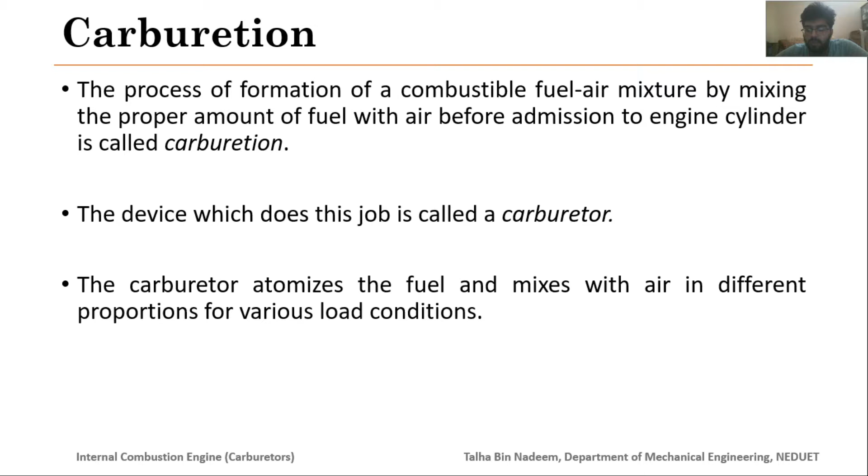Then we had a look regarding the carburetion. We discussed what is carburetion and what is the purpose of carburetor. We concluded by saying that the carburetors are those devices which form the air-fuel mixture, and not only form the air-fuel mixture, but also atomize the fuel depending upon the various load conditions. And why is the atomization important? In order to ensure the formation of homogeneous mixture.

Then we discussed the factors which affect the carburetion. First one was the engine speed, how the variation in engine speeds regulates the requirement of the air-fuel mixture. Then we had a discussion regarding the vaporization characteristics of the fuel, that if the fuel is volatile, it is going to make a more homogeneous mixture.

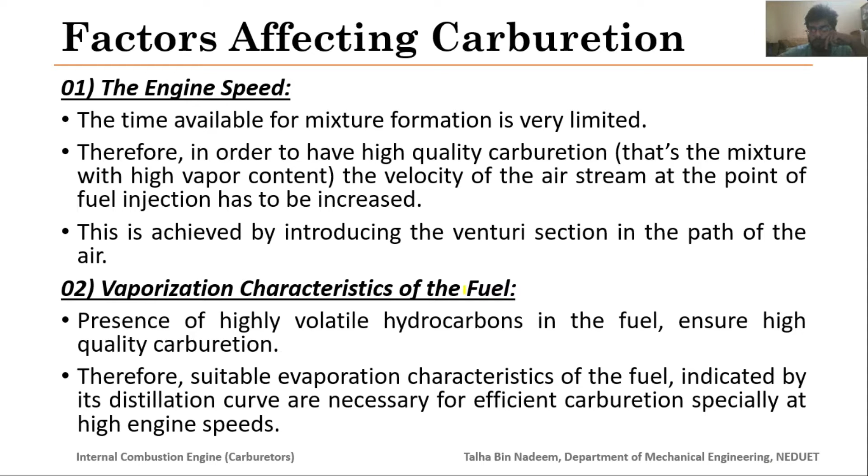The third factor which we discussed was the temperature of the incoming air, and we concluded by saying that higher incoming temperature of air will increase the vaporization of the fuel, which is basically a benefit. But the disadvantage of increasing the temperature of incoming air is that it will reduce the volumetric efficiency of the engine, as the mass of the air going into the combustion chamber has been reduced, so the volumetric efficiency will decrease.

The last factor which we discussed was engine design, and we discussed that when we have a number of cylinders in an engine, and we want to supply the same air fuel ratio in each cylinder, for that purpose the designing of an engine is very important.

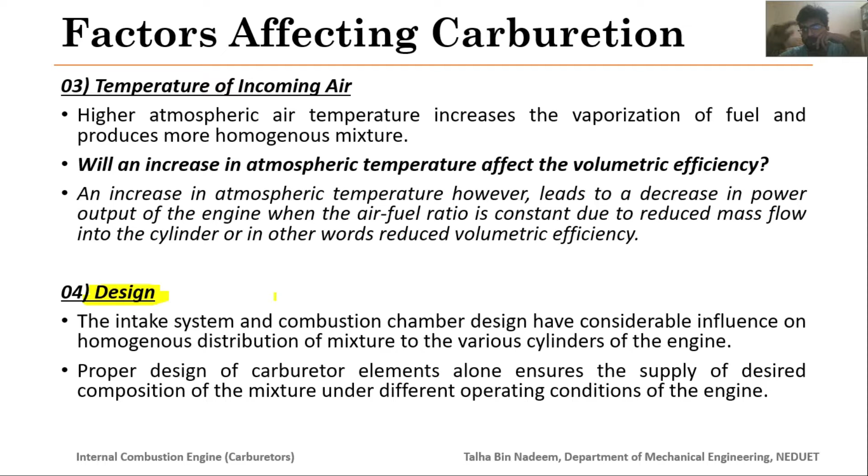Then we started with the air fuel mixture requirements, and we had a detailed discussion regarding the chemically correct, or you can say stoichiometric mixture. Then we studied the rich mixture and lean mixture as well, and we also discussed this diagram, in which we concluded that from 9 to something like 19, this is the combustible range. Within this range your IC engine will operate

quite comfortably, but if you go beyond this range, when the mixture is too rich, we have a less amount of oxygen, so improper combustion may occur, or the flame may not propagate throughout the combustion chamber. Similarly, in the case of the lean mixture, if we have too many air molecules, they will not allow the fuel to burn as well. In fact, they will not propagate the flame in the whole combustion chamber.

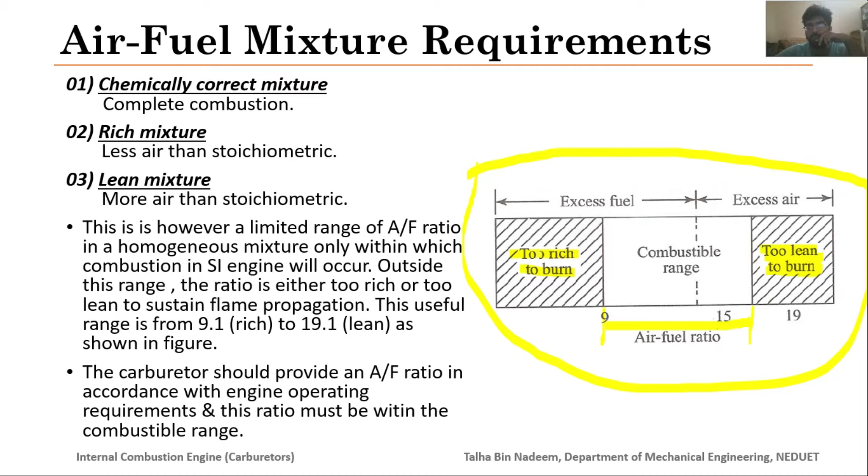Then we discussed these graphs. In fact, there are two graphs, air fuel ratio and power output, and the second one is air fuel ratio and brake specific fuel consumption. And we concluded this graph by saying that whenever we require higher power, we have to provide a rich air fuel mixture. This is the stoichiometric mixture line, and if we provide the rich mixture, which is on the left side of this stoichiometric mixture line, then we can have the best power output, which is the requirement in the case of acceleration or in the idling case.

And then we also discussed this second graph, of the air fuel ratio and the brake specific fuel consumption. In this graph we basically concluded that when you are operating under normal conditions or you have a cruising operation, then you will not provide a stoichiometric mixture, rather you will provide the best economy mixture, which is slightly leaner than the stoichiometric mixture. So under normal conditions, it is desirable to have a maximum economy mixture, but when you require quick acceleration or maximum power, you require a rich mixture. When you require more power, you will send rich mixture. When you require best economy, you will send lean mixture.

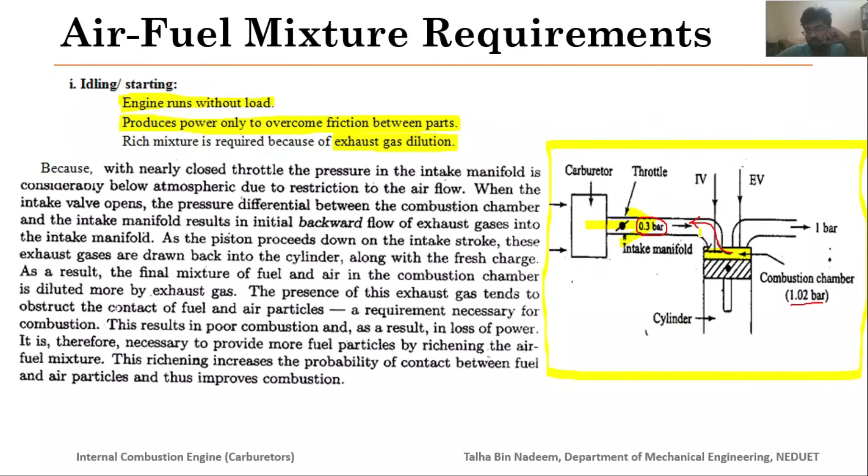So in that case, these exhaust gases will dilute the fresh incoming air-fuel mixture, and when the piston goes down, it will come again inside the combustion chamber for combustion, and your fresh air-fuel mixture has been diluted. This ultimately affects your combustion, there will be some power losses, and you will not get the proper output which is desirable to overcome the friction between the static parts.

So you can simply say that because of the pressure difference, initially there will be a backflow of the exhaust gases into the intake manifold, which will ultimately dilute your fresh incoming air, which will result in poor combustion and loss of power. So to overcome this situation, we will provide some additional fuel, or you can say a rich fuel air mixture.

And by rich fuel air mixture we mean we will have more fuel particles along with the air particles. I explained the rich fuel mixture in the last lecture as well: for example, if a molecule of a fuel requires 10 air molecules for proper, stoichiometric combustion, and instead of providing 10 molecules I provide 8 molecules of air, this will be called a rich air fuel mixture.

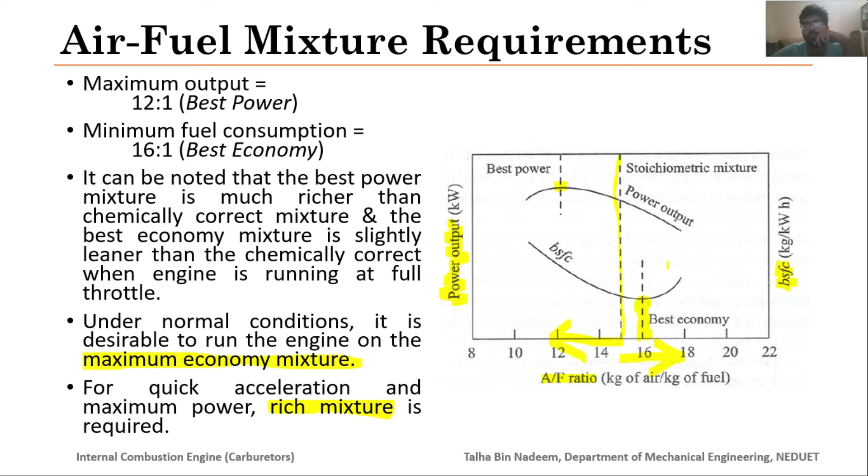So it is good that under the normal condition, if you are providing a lean air fuel mixture, you will have a lower brake specific fuel consumption, and your power outputs would be the same, since the engine is already operating on those conditions.

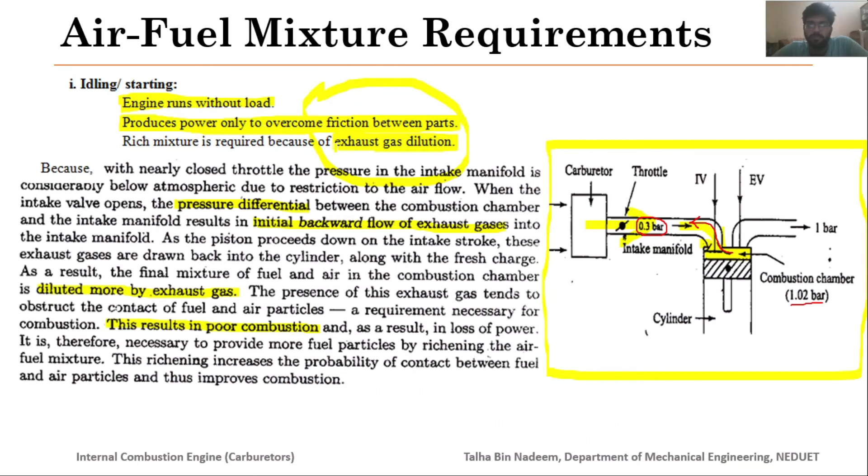So these are the basic components which we have discussed so far. I hope it is clear to you. Today we started with the idling and starting condition. Then we moved towards cruising and normal power, then to maximum power. Then we discussed some of the basic components of the carburetor.

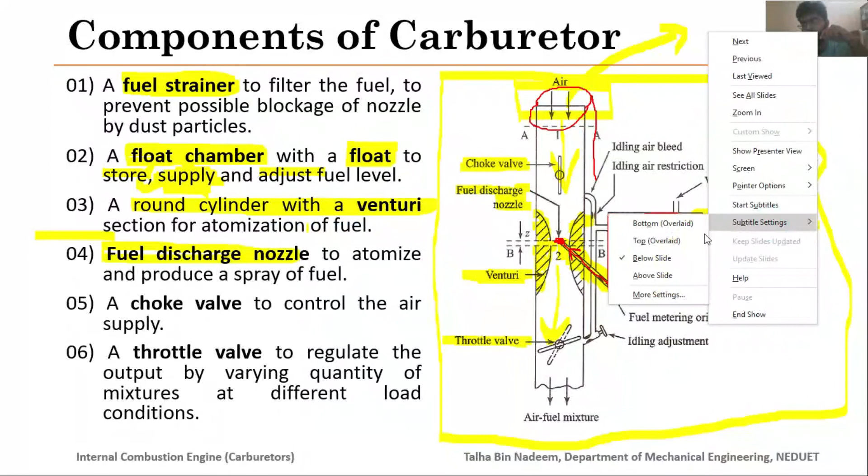Then the air flows into the venturi section, which is sometimes also referred to as a choke tube or a converging diverging nozzle, where the air velocity increases at the expense of a decrease in pressure. And I have already explained that the velocity of the air will increase when the air goes from point 1 to point 2, and because of the increase in velocity, the pressure will decrease.

And because of this decrease in pressure, there is a pressure difference between point 2 and inside the float chamber, because of which the fuel will be sent from the float chamber. The fuel will flow from inside the float chamber into point 2 because of the pressure difference. And then it will not only mix with the air but also atomize, and then it will move towards the intake manifold and then into your combustion chambers.

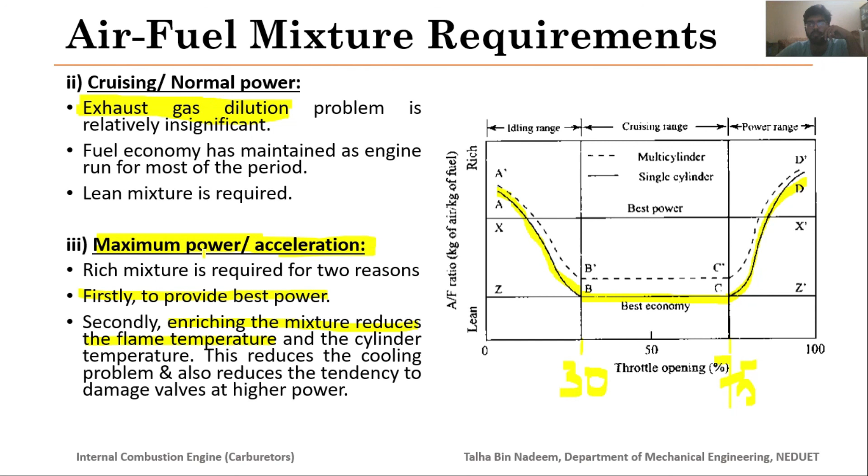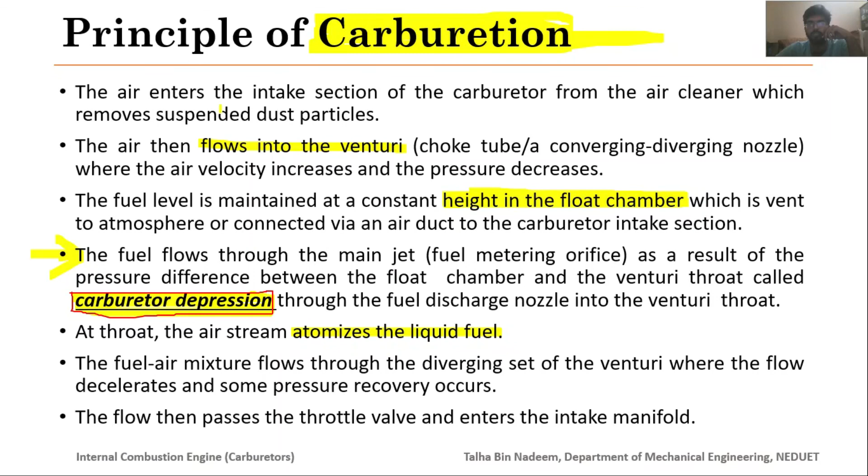Okay guys, so far what we studied today: we started with the different operating conditions: idling and starting, cruising or normal power, and the third one was the maximum power or acceleration condition. Then we discussed the basic components of a carburetor in detail. Then we studied the principle of carburetion, and then the deficiencies of the elementary carburetor. In the next class we will discuss some additional equipment incorporated in modern carburetors to overcome all of these deficiencies.